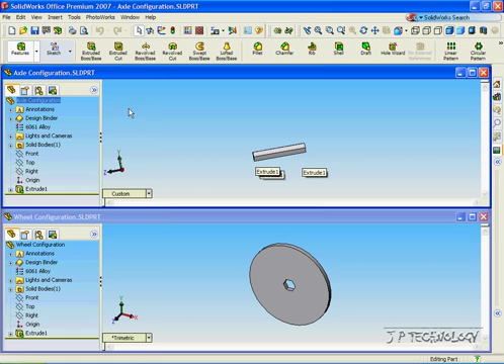To start off, let's open up a brand new assembly file. Click File, click New, click Assembly, click OK. Now let's view the origin: click View, click Origin, and click the axle configuration, and let's put it onto the origin.

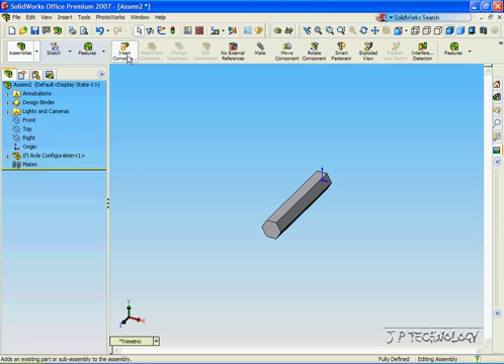Now let's insert the wheel. Click Insert, click Wheel, and let's put it to the left.

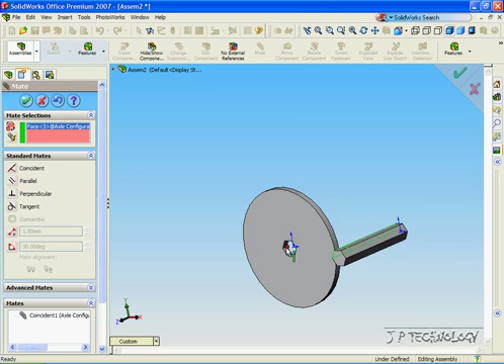Now let's make a couple mates. Let's mate this face and the top face, make them coincident, click OK, and let's mate this face, and also make them coincident. Now what we've done is we've made this wheel concentric to that axle. Click OK.

Now click the Configuration Manager, right-click Assem2 Configurations, and click Add Configuration. Now let's make one. We'll call it Left. Click OK. Right-click, click Add Configuration.

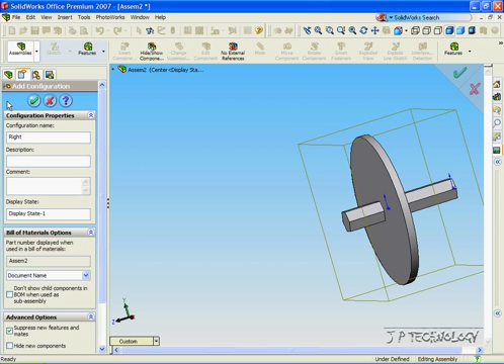Let's call one Center. Click OK. Now right-click again, click Add, and we'll make one called Right. Click OK. So what we're going to do is we're going to have one at the left, one at the center, and one at the right.

So to do this, let's start off with the one at the left. Let's double click it. Let's go back into the Feature Manager, and now let's make a mate. Let's click Mate, click this face, click OK.

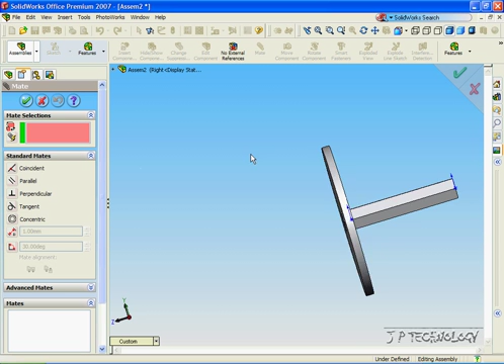Click Accept. Now go back to the Configuration Manager, double click the right, go back into the Feature Manager, click Mate, and let's mate this face to this face. Click OK, click OK.

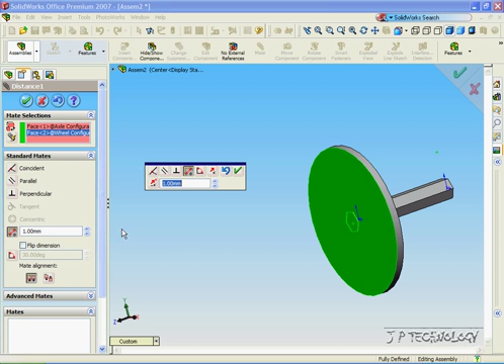Go back to the Configuration Manager, click Center, and now let's click Mate, click this face, and this time we'll do a distance. Let's make this distance 70, and that's pretty much in the center. Click OK, click OK. Now when we click the left, it'll be at the left.

When we click the right, it's going to be at the right. When we click the center, it's going to be in the center. When we click default, it's also going to be in the center.

Now let's look at this. Double click on your left, go into the Feature Manager, open up the mates, and you can see that only 3 mates are used and the other 2 are not.

Go back into the Configuration Manager, double click right, click the Feature Manager, open up the mates, and you can see only this mate is used to create the right configuration.

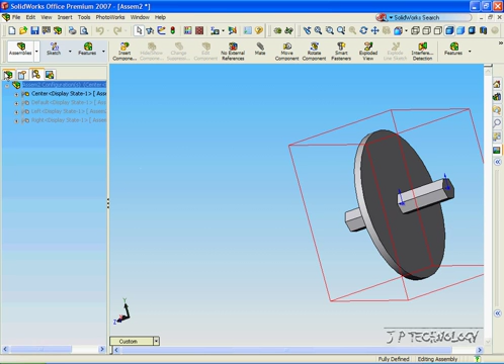Go back into the configurations, double click Center, click the Feature Manager, open up the mates, and you can see that these 3 are used, the highlighted ones.

So this allows you to make multiple configurations within one assembly. With your one assembly, you'll have a left position, a right position, and a center position. And this concludes our tutorial on how to make multiple configurations within an assembly.